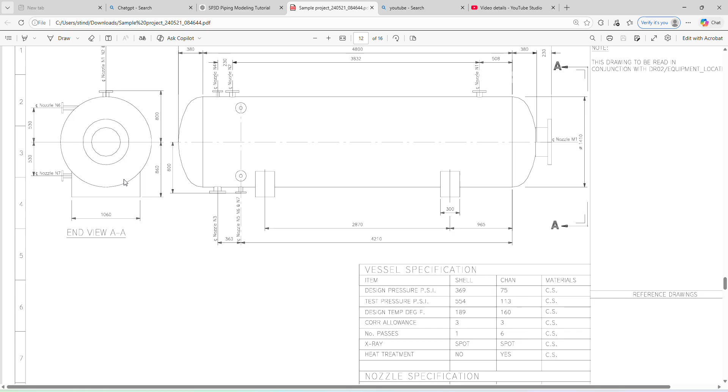First of all we will place N6. Nozzle 6 is basically 50 mm, 300 pressure rating. So now we will go to the place nozzle command. Just click here. Now select the datum point. Give the name N6 and make it 2 inch because it will be 50 mm. Pressure rating is 300.

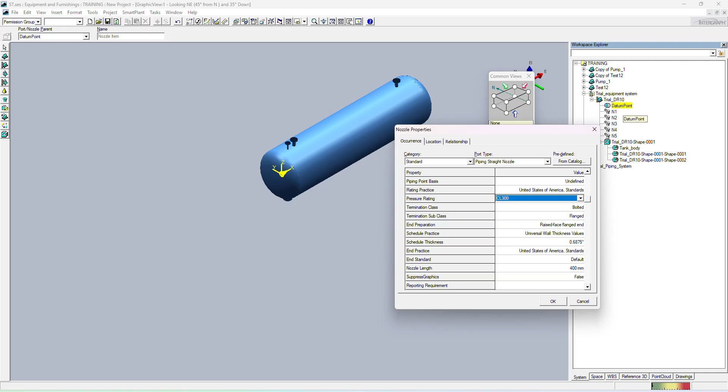And the length we will give a little more, because it will come from here to there this way. This will be a little longer and this will be till here only inside. Now go to the location. The location will be the distance from here to here. It will be 4800 minus 4210, which is 590. So I have entered 590 mm here.

For N2 I entered 905, but in this case it will not be 905, let us make it 705. But here we cannot use this radial type placement. Here we need to use tangential type. So there are different types of nozzle placement we need to give. So now we are going to make 590, 705, and here I will make it 0 mm because I want no distance.

I want it exactly at this x, y side, and then I will make it at a degree. So this will be from this point to this, 530. So now I'll enter 530 mm here. Now here I'll give 0 degree. I'll say finish. Now let's see how it has been placed.

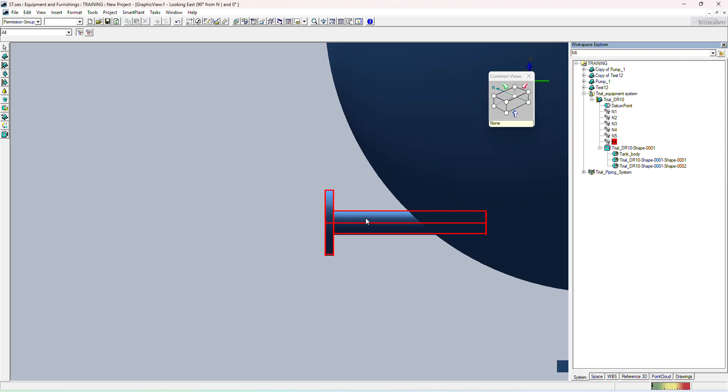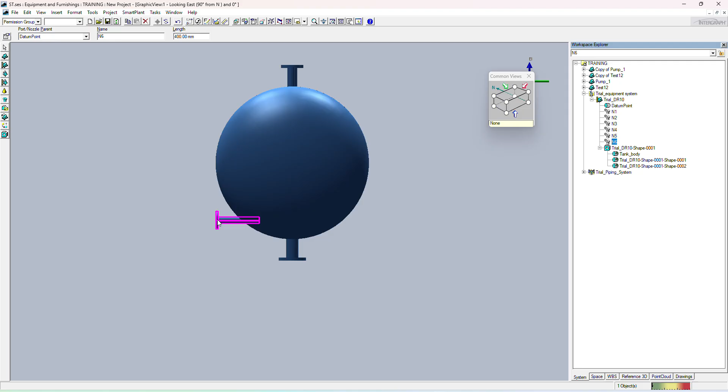Now we can see we have placed this nozzle, and it is coming perfectly like N7. But we need this at the N6 location. So we need to change this property a little bit. Let's do a trial. Go to the properties. If I enter minus and click apply, it reaches the location I wanted. So N6 is now at the perfect location.

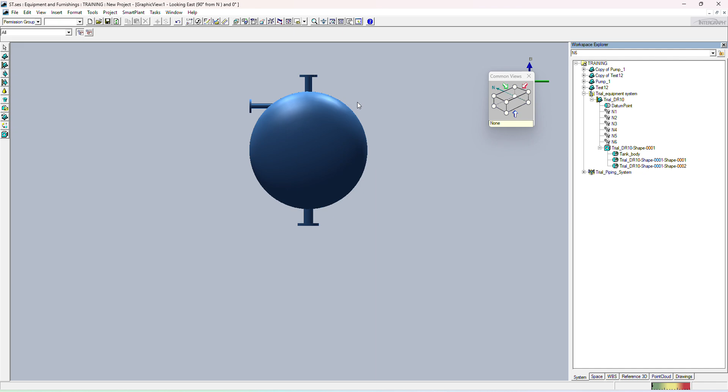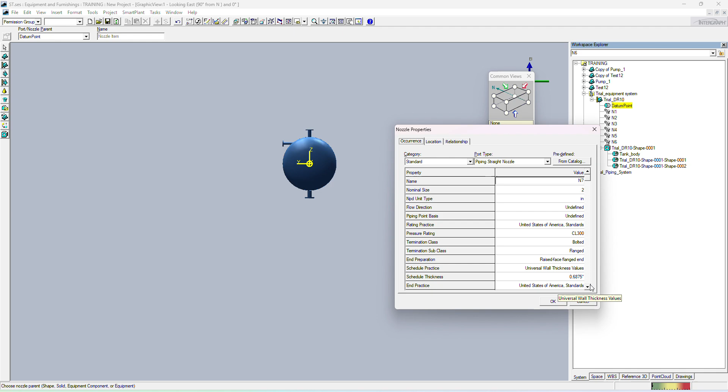Now let's move to the next nozzle, N7. We will go again to the same command, place nozzle. I'll select the datum point again. In the occurrence I'll give the name N7. N7 is 50 mm again with 300 pressure rating. 2 inch, pressure rating 300, same standard. This is raised face flange end. We will give the same length.

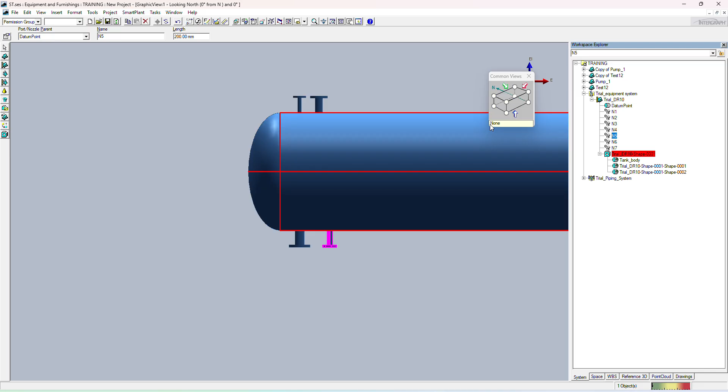Now in the location, we need to give everything similar. This time we will not give the minus. Let's say okay. Now we have placed all the nozzles. Nozzles 6 and 7 are here at this point, as per this drawing, N6 and N7 in the front view.

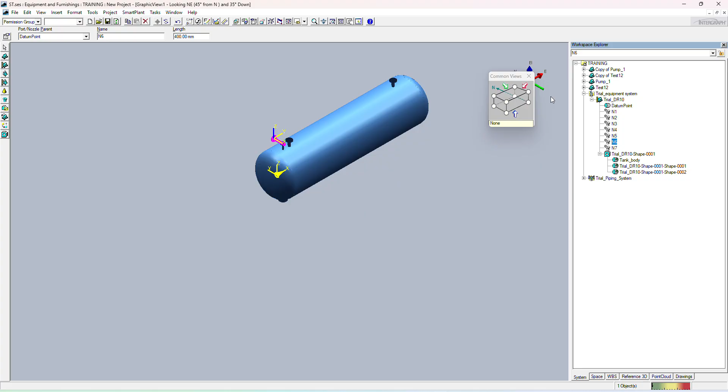So I hope it is clear how we can place all these nozzles. I want you to go and try different types of nozzle placement. I used tangential because I want exactly this degree and then this distance. If you want radial, just give the degree without any distance. Axial is useful when you want a particular angle along with the degree. As per the requirement and this image, you can understand what exactly you want.

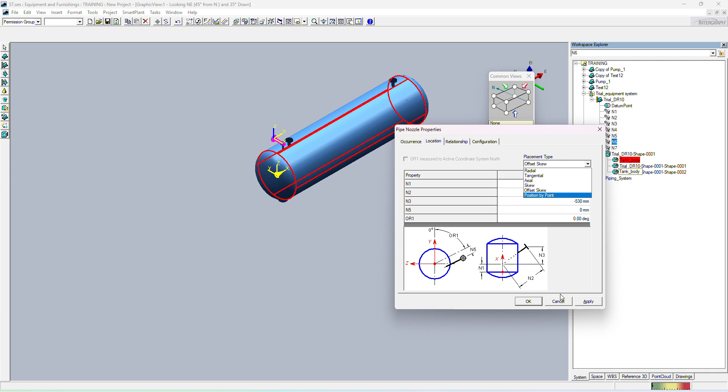Skew will be useful when we place a pressure indicator, thermocouple or thermometers, something going inside from the side. Offset skew is when we have a degree and want an offset from that degree. There is one more, position by point, which I will show you when we place the manhole. So I will cancel it. N6 and N7 have been placed, perfectly as per the drawing.

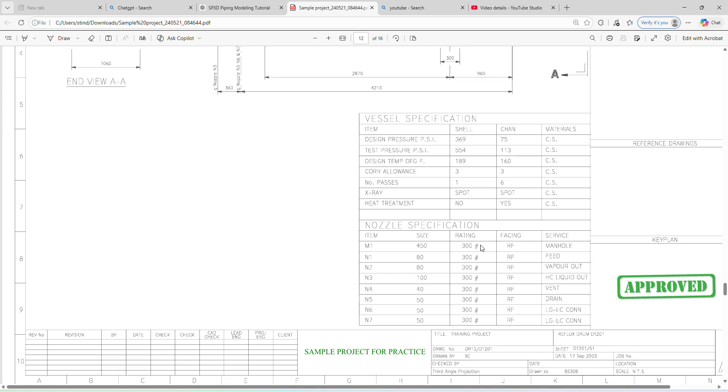Now we need to place the next item, the manhole. I'll show you the placement of manhole along with two methods for how we can place it. This nozzle has a depth of 230. M1 is basically of 300 pressure rating, and the size is 450. So there are two ways how we can place it.

Same procedure, go to place nozzle, select the datum point. So here when we are going to place it, we can try this one.

Now what will be the distance from here to here? N1 will be from this point to the head of this point. We need to change the nozzle length. I want it at 230. Let me try 230, and this length will be from this point to this point.

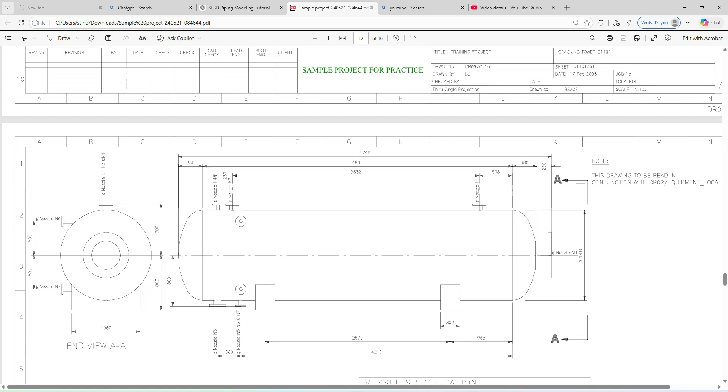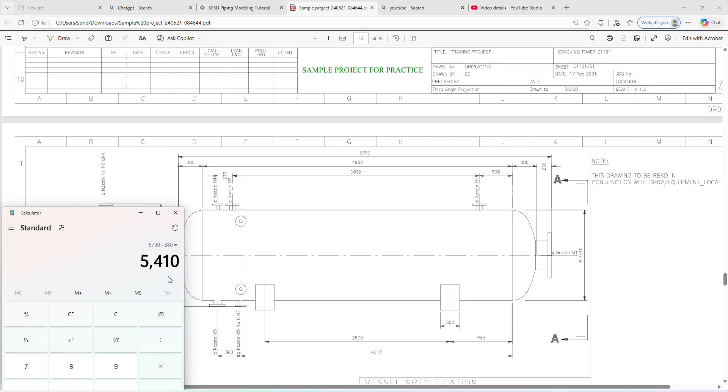So basically that will be 5790 minus 230. No, this will be 5790 minus 380. What we are doing is finding the location from here to here, but we have this complete 5790, so we are going to minus 380, giving us 5410. So we will enter 5410 here.

Second is N2, but I don't want N2, so I'll give 0 because I want it at the center. OR1, I don't want that either, I'll keep it 0. Now let's see how it is going to be placed.

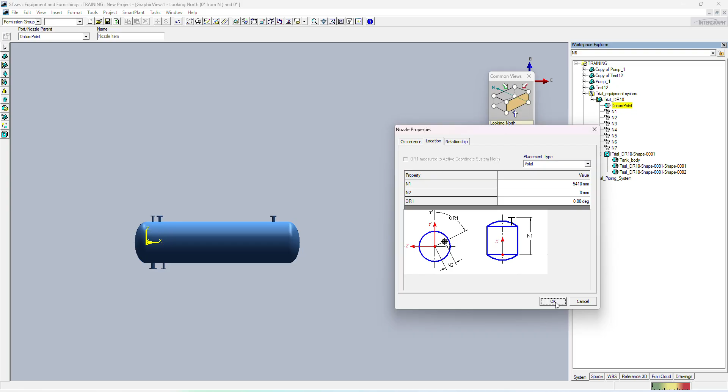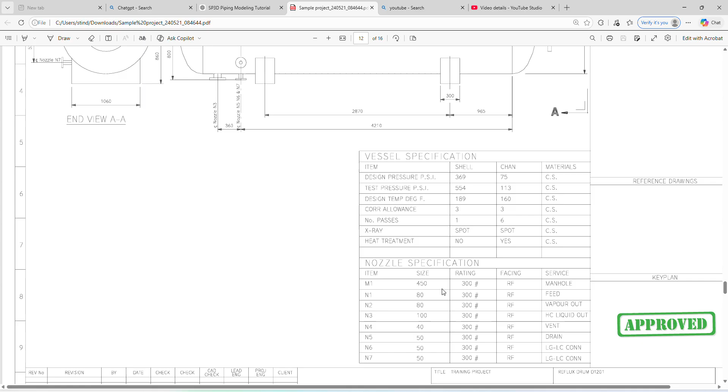Okay, this looks good, but the problem is we did not give the size. So I'll change the properties. I need to select the appropriate size here. This is M1, manhole 1, and this is going to be 450 mm, which is 18 inches, pressure rating 300, and all other things look okay. I'll say okay.

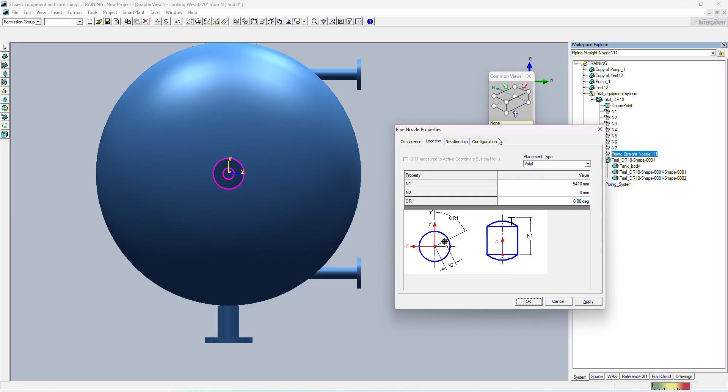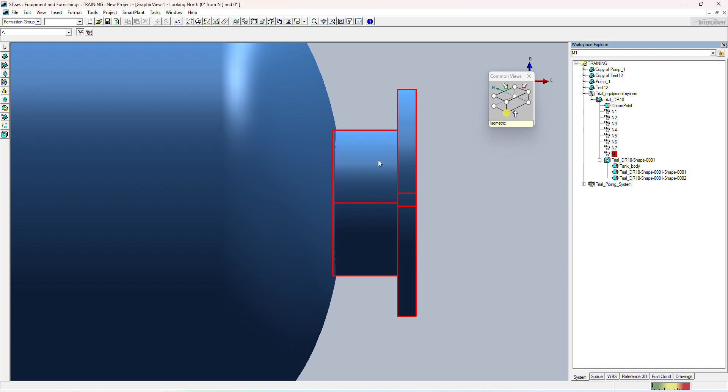This is one way how we have placed this manhole, but this is a little less. I don't want it like this, so I'll make it longer because it is not perfectly placed. I'll make it 260 and apply this. It should be merged now. Now it is exactly at the center location, and we can see from any view it is exactly at the center. I hope this point is clear to you guys.

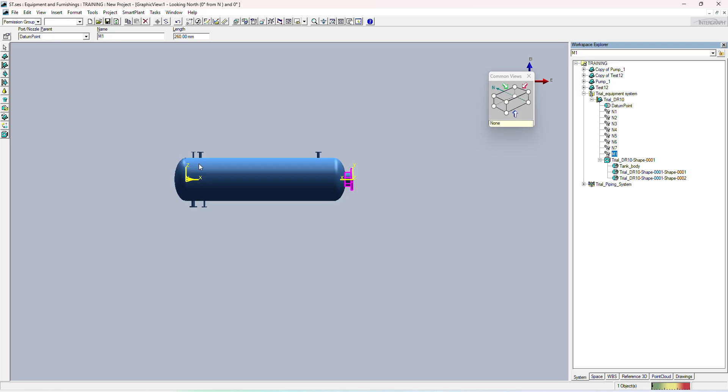Now we will see how we can place this manhole using a different method. This one is having a connection with this datum point. All nozzles we have placed till now are having relation with this datum point. If you want to place without a datum point, how can we place any nozzle?

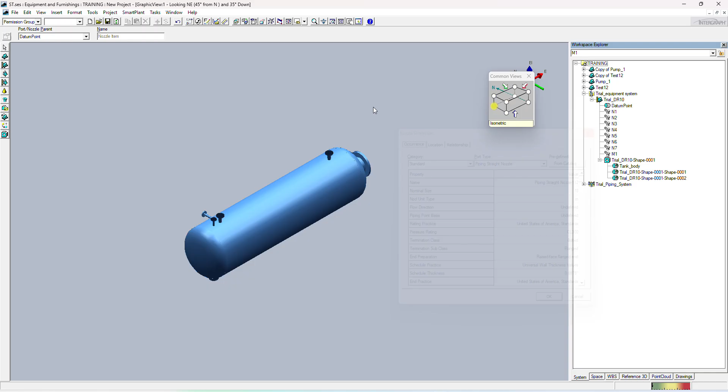For that, we just go to the place nozzle command. You can directly select any equipment, or even select the datum point, no problem. Just select anything - in that case you can select directly the equipment also. Let me show you with the equipment. Just go to place nozzle, select this equipment, give any name like M1.

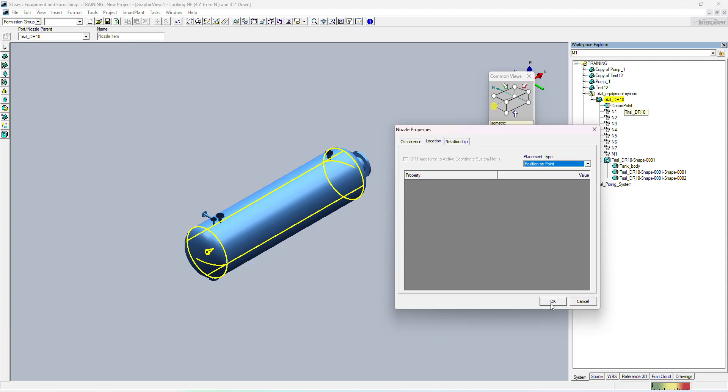I'll give the same properties, everything. Now I'll go to the location. Instead of selecting the placement type, I'll go and select position by point. I'll click OK. So when I do position by point, it means I can place it anywhere.

If I want, I can place it here, just above this. Or I can place it any other way, or place it outside and rotate it. I'll show you - I will rotate it and place it on the back side. Now I'll rotate this. I selected the move command, I need to select this, make this rotate. So we need to rotate with reference to this, basically EL, up and down.

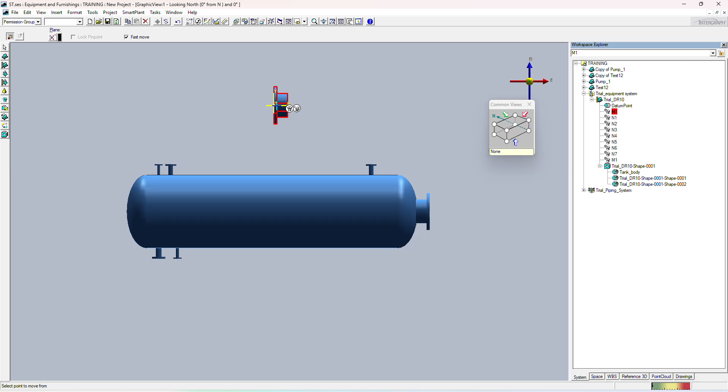If I make it 180, yeah exactly, it has been moved now. So now my scenario requirement will be, I need to shift it, fix it. I want to pick it up from this point, so that will be easy for me. But now it is picking from there only. Okay.

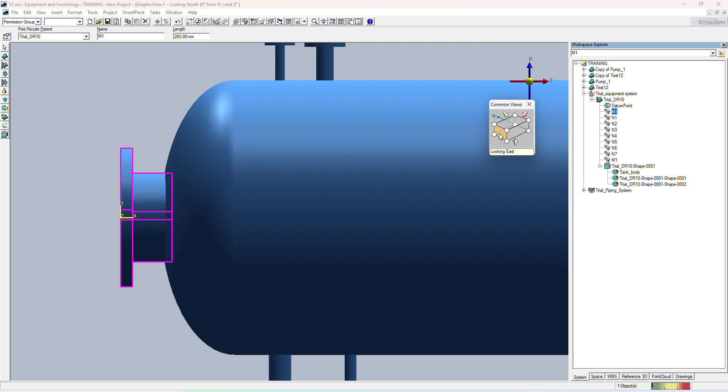I will place it now because I wanted to place it at center. Now I'll select this, I'll give this point. Now I can place it like this anywhere. And that's it - here we have not given the reference of a datum point, and in the other way we have given the reference of datum point also. So this is something we can place anywhere, in any way.

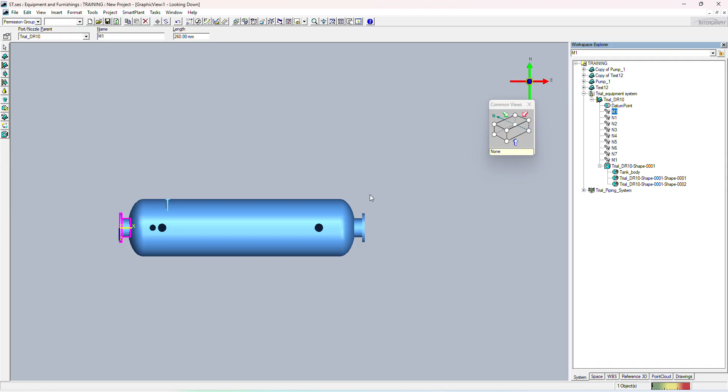So in this third part we have finished all the nozzle placement. In the next video we will be looking - now I'll delete this one because we have not placed it properly. Okay, I'll delete this. And if you have any confusion till now, just let me know in the comment section, guys.